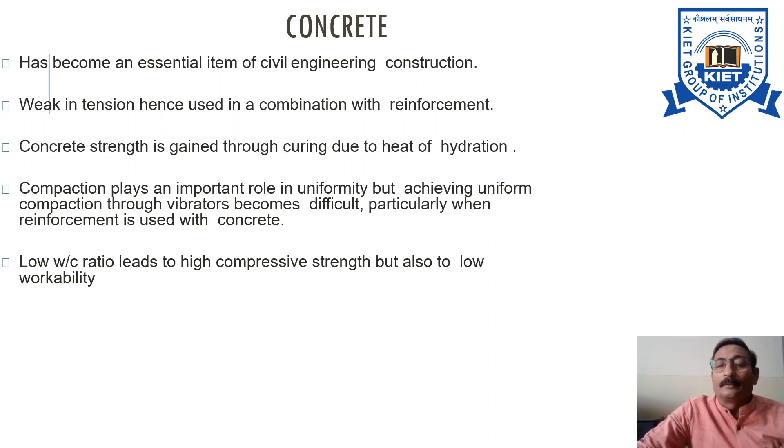Now when we are talking about high strength concrete, low water cement ratio or low water binder ratio affects the concrete. If reinforcement bars could have been avoided, or concrete could have tensile strength, then we would have reduced the cost and the time of concreting, and the durability of the structure would be more if the reinforcement used has non-corrosive properties. So if it had been possible, we would not have used the reinforcement.

If curing could be avoided, it would have accelerated the gain of strength, or the gain of early strength. Then the speed of construction would have been fast. And as I said, compaction is required. So if compaction could be achieved without using a vibrator, or concrete could be cast without reinforcement bars, then it could provide uniformity.

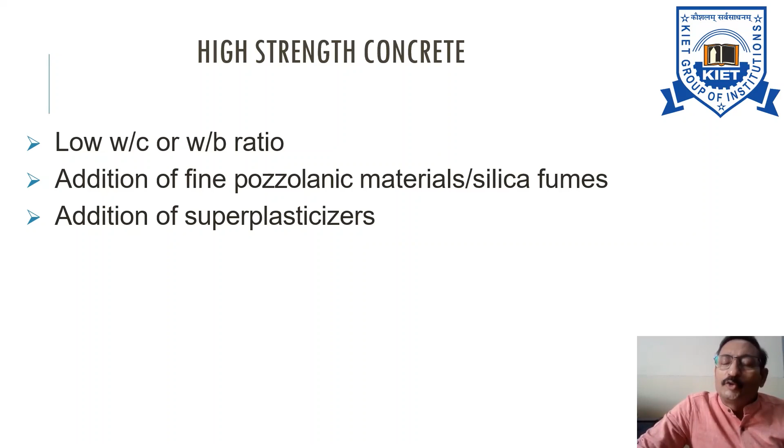But it is not possible to reduce the water cement ratio, because we need workability, and without workability the placement of concrete becomes a problem. So when it has been decided to make a high strength concrete, it is required to make the water cement ratio least, and for that purpose we have to add some pozzolanic materials such as silica fume or fly ash. Nowadays, superplasticizer is also being used.

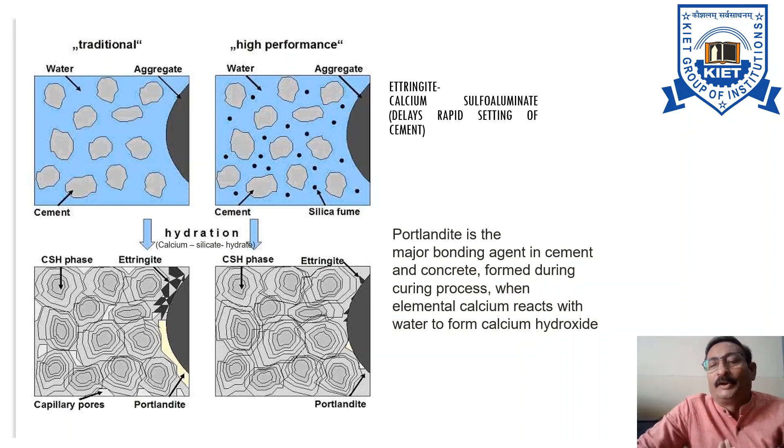So there is a difference between traditional concrete and high performance concrete. High performance concrete is not exactly high strength concrete; there is a bit of difference between both of them. But all high performance concrete is high strength concrete also.

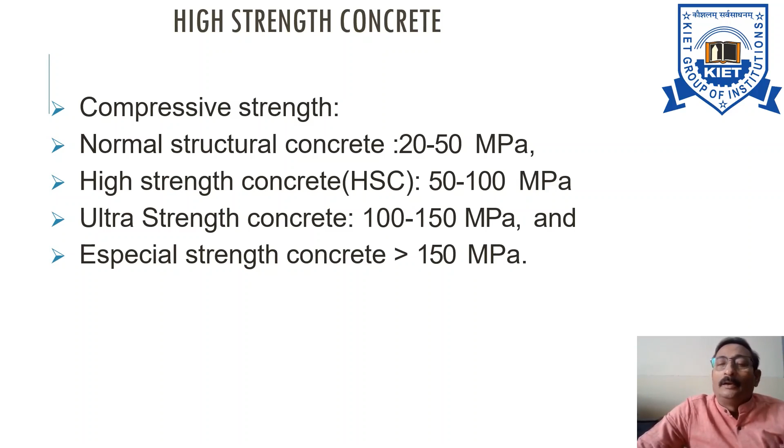Now if we compare compressive strengths, normal structural concrete has a compressive strength of 20 to 50 MPa, and high strength concrete has a compressive strength of 50 to 100 MPa. If you are making ultra high strength concrete, the compressive strength is 100 to 150 MPa. Some special strength concrete is also there, where the compressive strength is more than 150 MPa.

So when you are making high strength concrete, you have to select suitable materials. The main material for any concrete is the coarse aggregate. The nominal maximum size can give the optimum strength. That is why 9 mm to 12 mm, or more precisely 9.5 mm to 12.5 mm, maximum size aggregate is used.

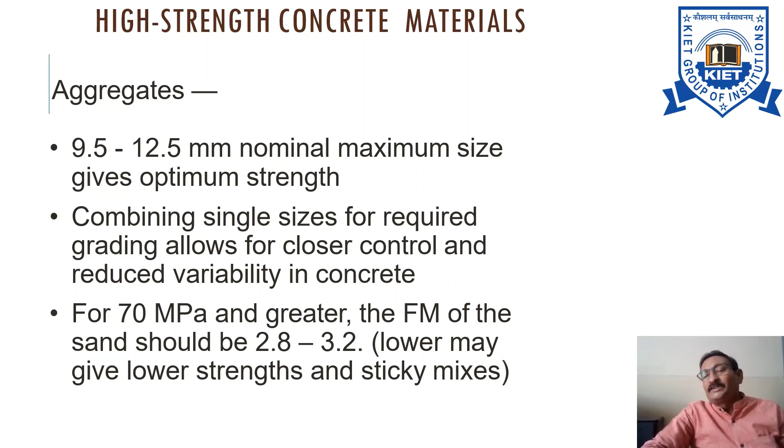When you are combining single size aggregate, you can have closer control and the variability in the concrete can be reduced. For fine aggregates, when we are making a concrete of 70 MPa or greater, you have to take care of the fineness modulus of the fine aggregate. It should be in the range of 2.8 to 3.2. If the fineness modulus is less than 2.8, it will give lower strength and the mix will be more sticky.

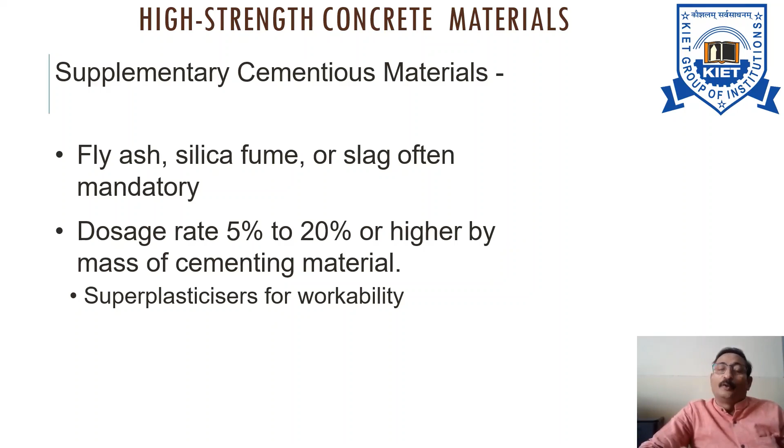Now, when we are making high strength concrete, we have to use several supplementary cementitious materials also, such as fly ash, silica fume, blast furnace slag. Sometimes they are mandatory to be used. And when you are using these supplementary cementitious materials, the dose of these materials should be in the range of 5% to 20% or higher by mass. And to maintain the workability, we have to mix some superplasticizer also.

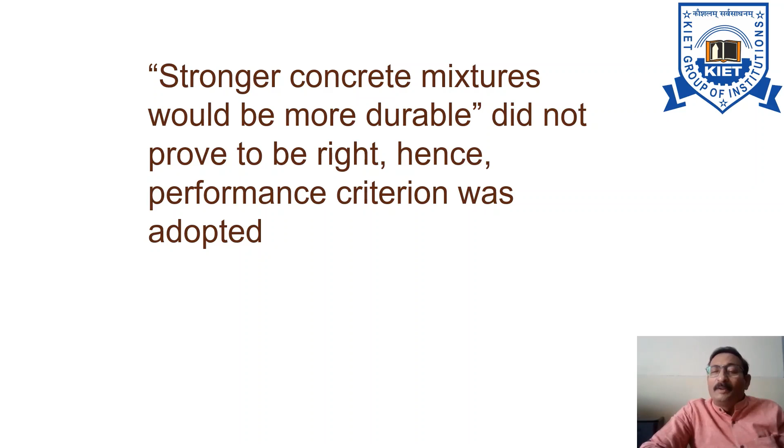Now, as it has been said that stronger concrete mixtures would be more durable, it is not always right. The performance criteria is more important. So you have to check the performance criteria of the concrete which you had cast. The properties which are required are that it should be highly workable, high durability,

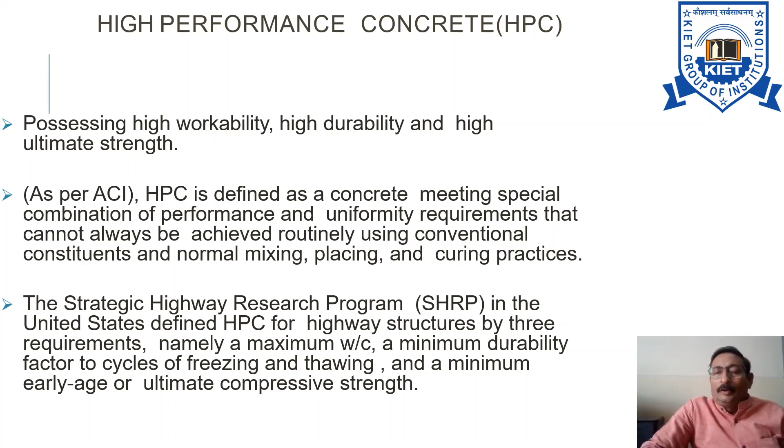high ultimate strength. As per the American Concrete Institute, high performance concrete is defined as a concrete which meets a special combination of performance. A special combination of performance means the abrasion resistance. All these things have to be taken care of, and uniformity requirements that cannot always be achieved routinely if we are making conventional concrete by normally curing it. So we have to take care of all the properties which we are using to make the concrete and the performance of the concrete after casting or after 7 or 14 days.

Now, the characteristics of HPC which have to be taken care of are high early strength. It has to gain early strength in 3 days or 7 days. High ultimate strength. After 28 days, the strength of the concrete has to be at least 80% of the targeted strength. High modulus of elasticity. High abrasion resistance. High durability and long life, especially when the concrete is exposed to severe environmental conditions.

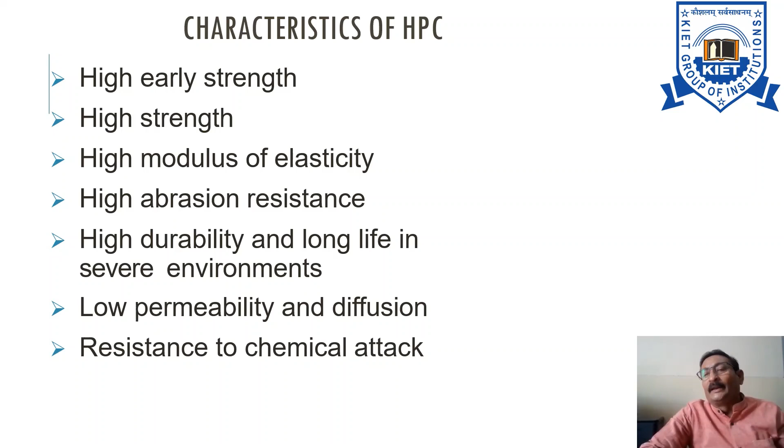Low permeability and diffusion so that carbonation can be decreased and no chemical can permeate through the concrete. And if the permeation is low, then obviously it will be resistant to any type of chemical attack. So this has to be taken care of in the case of high performance concrete. It has to be highly resistant to adverse climatic conditions, such as when you are concreting in cold weather. Then there are chances of freezing and thawing problems. It has to be tough. The toughness and impact resistance should be high.

The stability of the volume is required. It should not shrink while drying, and if it is shrinking, then it has to be very less. The main thing is the ease of placement. Since the water cement ratio we are taking is low, we have to make it in such a way that the placement is easy. And the very important thing, it should inhibit bacterial growth. It is very much required in the case of pipes or conduits.

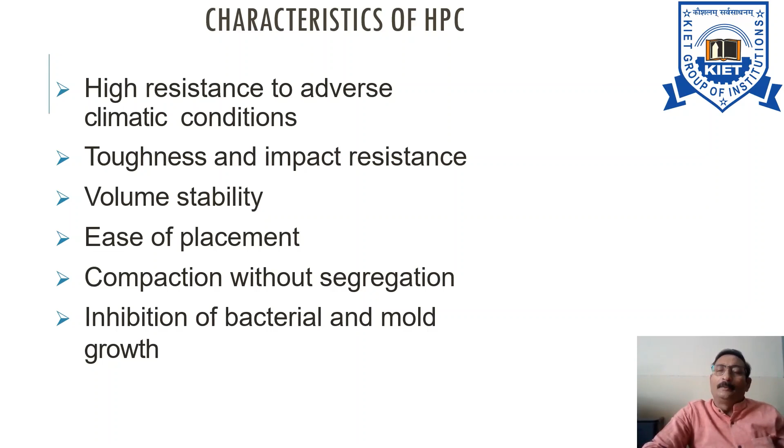Now, when we are discussing the materials, Portland cement is used for making the concrete durable and for better bonding of the aggregates. It is a cementing material. In the same way, blended cement, fly ash, silica fume, blast furnace slag, calcined clay, metakaolin or shale, all of them are cementing materials. They make the concrete more durable. They make the concrete high strength. And then we add superplasticizer to make it flowable, like a fluid.

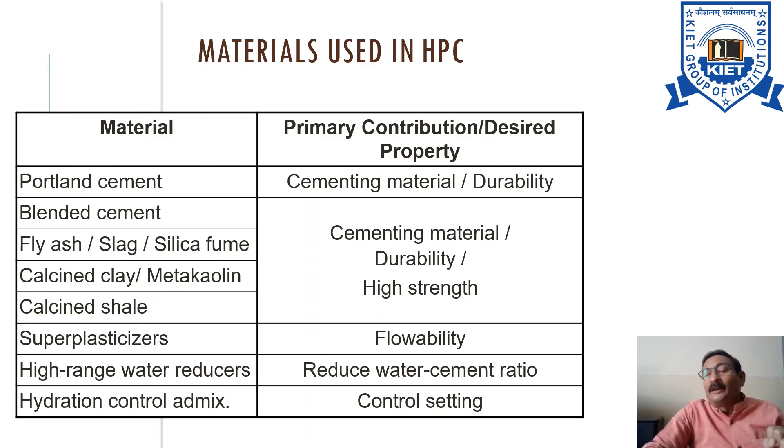Sometimes high range water reducers are also used because they can reduce the water cement ratio. And hydration control admixtures are used so that the setting time can be controlled. Retarders are also added to control the setting time, or if you want to accelerate the reaction, you can add an accelerator. Now, there are chances of corrosion of steel. In that condition, we can add corrosion inhibitors. And if we only have to reduce the water content or water cement ratio, we can add water reducers.

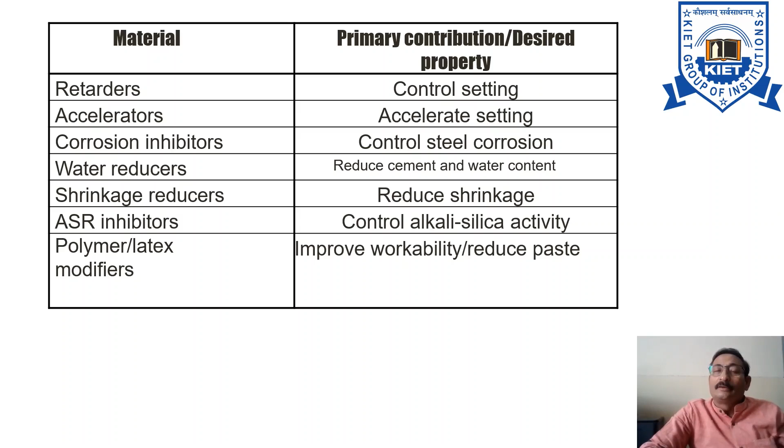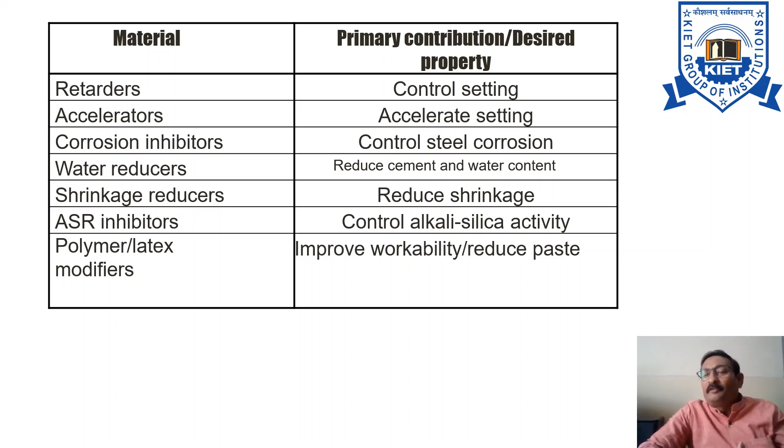To avoid the shrinkage, the drying shrinkage or plastic shrinkage, we add shrinkage reducers. If the aggregate has reactive silica, then to avoid and control the alkali silica reaction, we can add alkali silica reaction inhibitors. Sometimes to improve the workability or to reduce the paste, we add some latex modifiers or polymers. They are important materials which are used to make high strength concrete.

So if we discuss our objective, why we make this concrete, the reason is to put the concrete into service at a much earlier age. Or when you want to build a high rise building, you can reduce the size of columns and increase the available space if you are using high strength concrete. When you are building the superstructure of long span bridges, then to enhance the durability of the bridge deck, we can use high strength concrete.

Or to satisfy the specific needs of special applications, such as durability, modulus of elasticity, flexural strength. Suppose you are constructing a dam, a grandstand roof, a marine foundation, a parking garage or a heavy duty industrial floor. In all those conditions, we can use high strength concrete, and it is very useful in recent days.